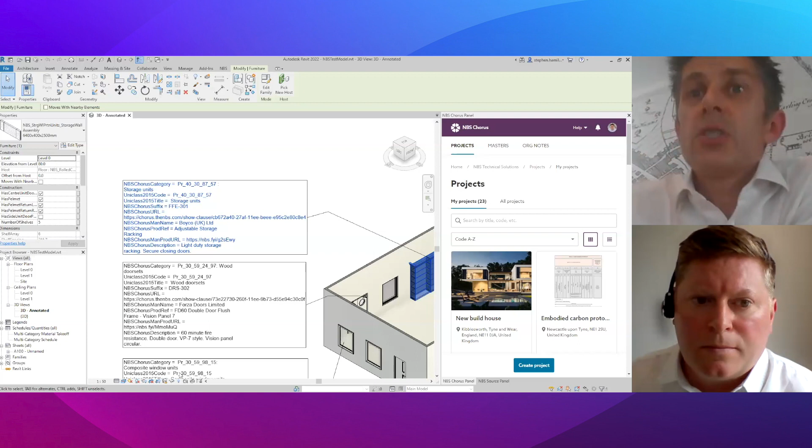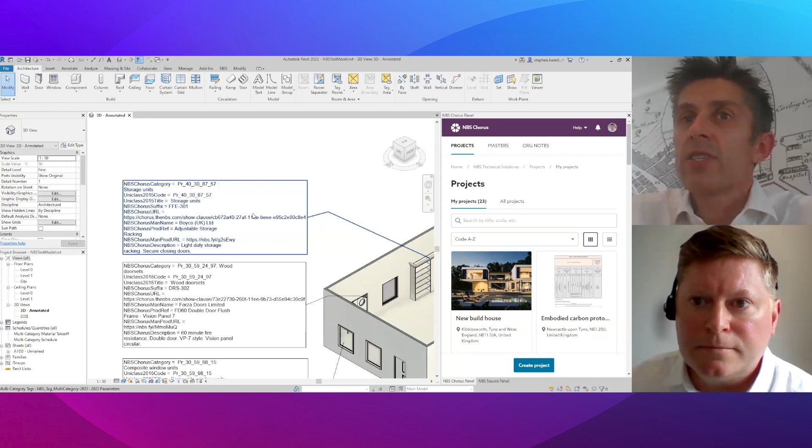But what I'm going to do is just open up this model in Autodesk Revit. It's not a design that's going to win the Stirling Prize. It's me putting a few windows and doors and carpets, etc. in. But this model, and I've gone completely over the top with the annotation here. I don't expect anyone would ever do this on a project, have so much info in there, but it's shown all of the properties that we're now sharing between NBS Chorus and the equivalent parameters in Autodesk Revit, either in family objects, layered objects, or the material layers themselves.

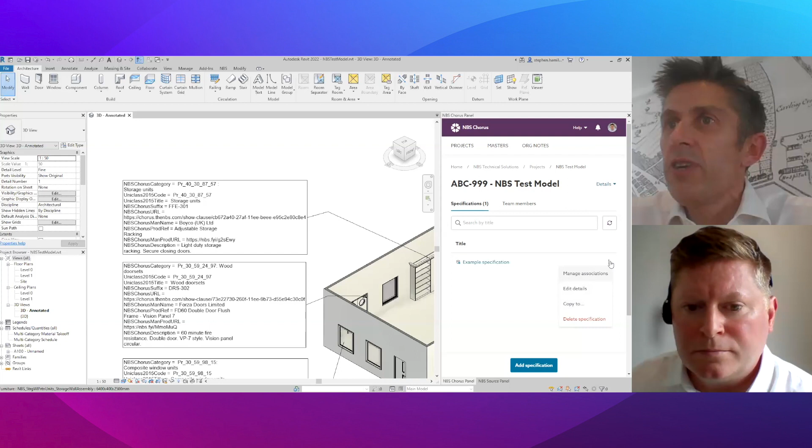So let's just show how this works. If you want to see the model integration stuff from first principles, there's excellent support information online. But this model here on the left-hand side has been associated with the specification inside of NBS Chorus. So you see the 3 dots there. You've got an association between the 3D model and the specification. And then to create a link between an object and the specification clause, you click on it here. And because that's already been linked, it jumps to the right clause.

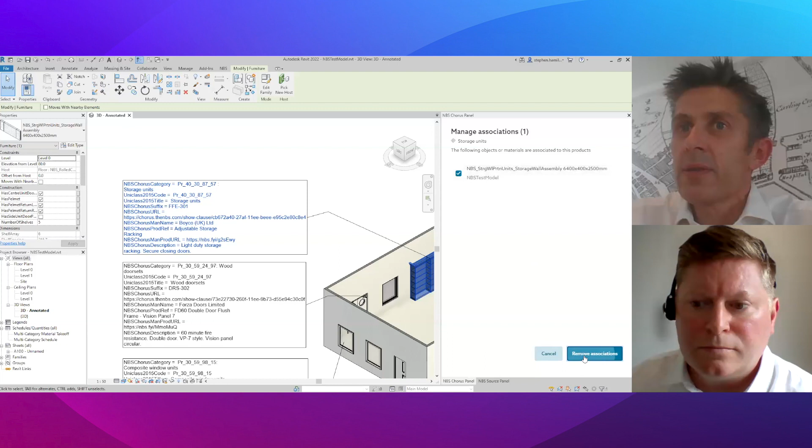Let's take that out for now. So I'm going to manage the associations and remove that link. So you'd start off with an object, which is in, say, Autodesk Revit here, and then I'd go and link it to the specification. And at the point where I link it to the specification, you're going to get a whole set of properties from NBS now drop into that object. And as I say, you might not want to put these in the annotation field itself. Keep that nice and short, classification code type.

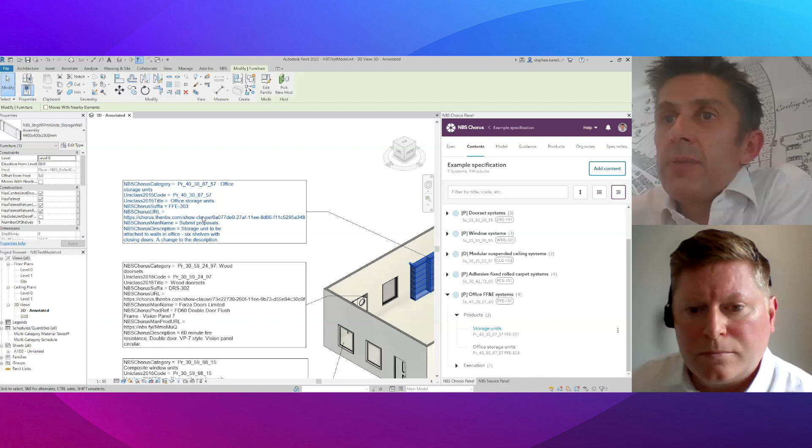But you probably do want to use them in things like material takeoffs and scheduling, and in the information you then share with people like client, cost consultant, main contractor, if they've got 3D model viewers, either proprietary or IFC. So that's now linked. So when I click on the storage unit here, it shows you the specification on the right-hand side, and note that this title is exactly the same as the parameter here, NBS Chorus description. You'll notice that FFE 303 is again exactly the same as well.

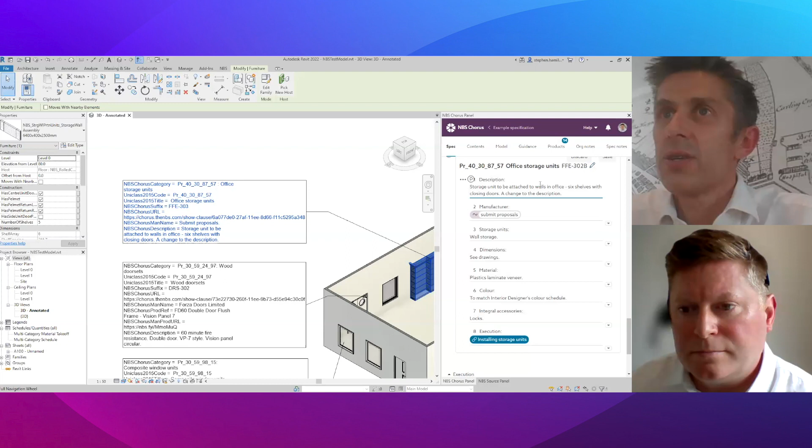So just to prove that, let's just change a couple of these. So let's call it 302B, and let's keep that nice and simple, make it shorter. So at the point where I click save now, we could potentially have a problem because the schedule will be out of sync with the specification. Annotations will be out of sync on your drawings with the specification.

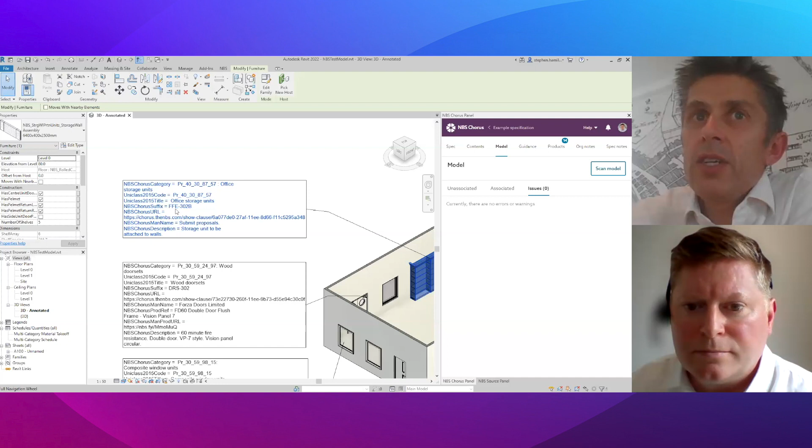But if I jump across here to the model, you'll see we've now got an issue in the model tab, and it's telling me that the parameters no longer match between the storage wall assembly object and the equivalent specification clause. So if you watch on the left-hand side there, when I click fix, you're going to see 303 change to 302B, I think it was, and the description get shorter. So update the object. And if you watch on the left-hand side there, it changes to 302B with the shortened description. So we're now allowing the information in the specification, the 7 or 8 key parameters, manufacturer name, description, Chorus URL, suffix, etc., to be shared.

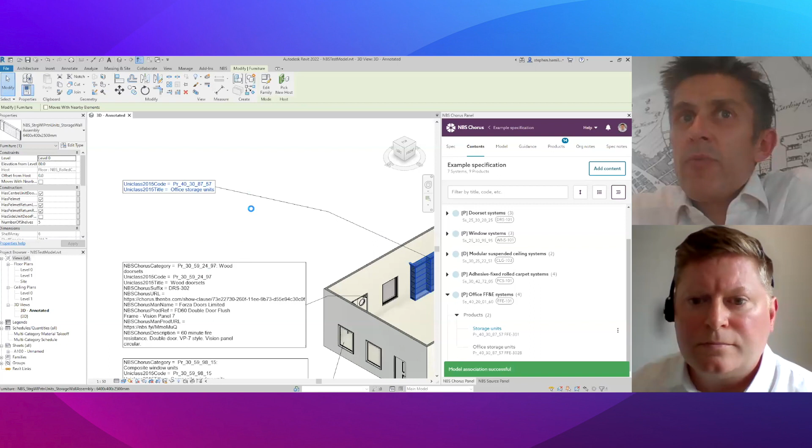Just to demonstrate that one more time, I'm going to change now the link between 302, which is this one, to the 301 storage unit. And as I do that, it re-associates all of the links with the different parameters. It takes a few seconds there because you might have lots of instances of that in your model.

One of the nice things is if it is a manufacturer that's been specified, over on the right-hand side you get the manufacturer name, in this case, Boyce, but also you're getting the manufacturer URL, which is what's trapped inside the spec there, which directs the user to NBS Source for the latest information. Is the product still available? Does it have an installation manual, third-party certification, etc.?

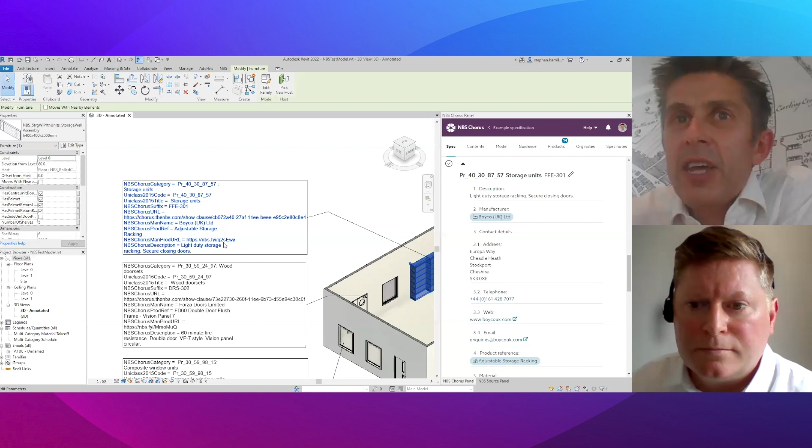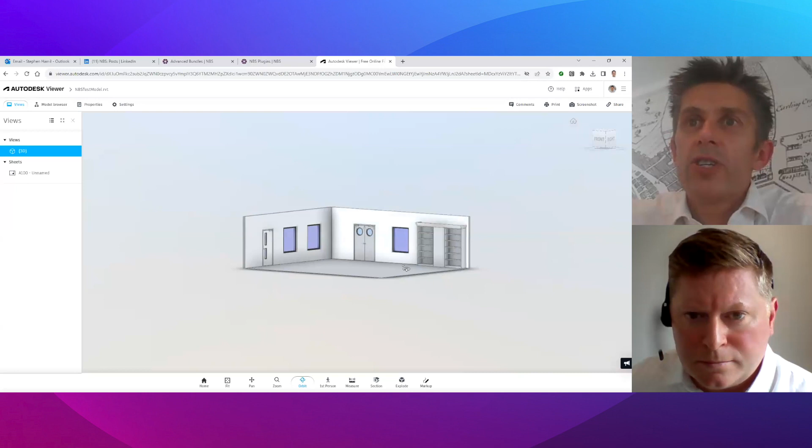So what I'm going to do now is demonstrate how this information can be used downstream. So you might work on design and build contracts and the main contractor wants to see it. You might work in an office where not everyone has access to Autodesk Revit and they use the online viewer, etc. So let's just jump across here. So here's the Autodesk viewer. This is just the free version. I guess it'd be similar if it was BIM 360 or what have you.

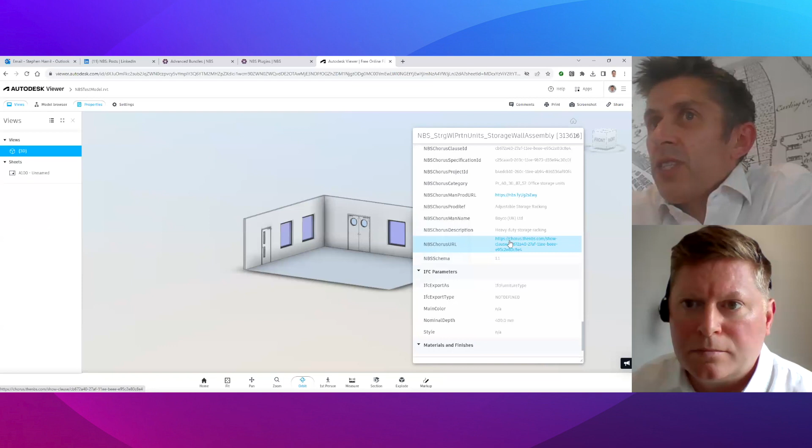I click on the storage unit and say, show me the properties. In the properties there, you're going to have those new NBS properties a bit further down. So you can see here, manufacturer product URL, clickable, Chorus URL. Working in a large practice where maybe the designer or the project lead wants to see the spec, you just click on here, and presuming you've got sign-in permissions for that spec, it'll jump straight to the specification. Maybe I've just got read-only permission and I can bang a little spec note in or what have you.

And when I click on the manufacturer product URL there, it jumps across and takes you to that manufacturer in NBS Source. And what we did, maybe there'll be some questions on this when we look afterwards, we really pondered on which parameters to use. So if we come back here, you see we've grouped them all as new parameters with the prefix NBS. And we were torn between, do we try to override existing parameters like manufacturer and model reference, or do we keep it nice and clean and just have an NBS property set?

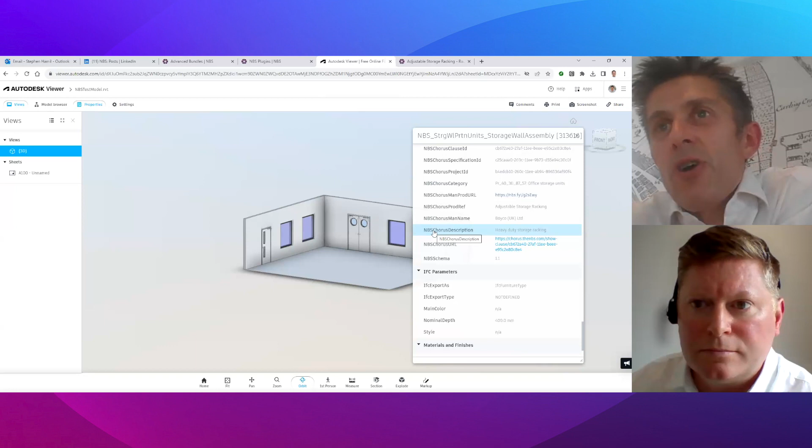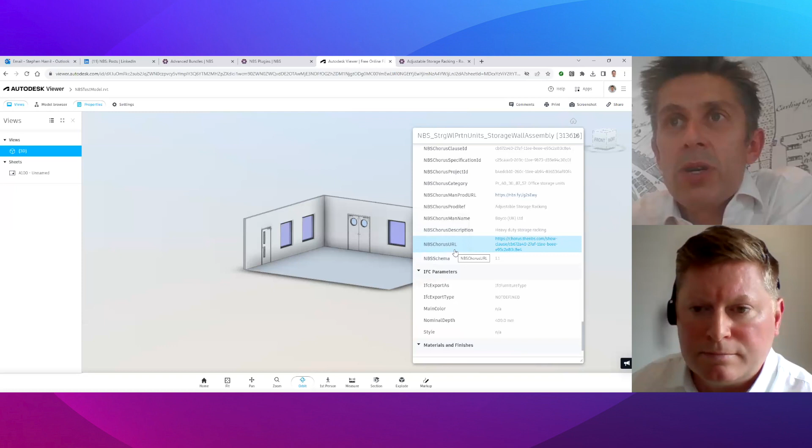And because a lot of people have read-only properties, or they maybe don't want the NBS Chorus plugin to override what someone has, we thought we'd keep that nice and clean. This is NBS information all in a set of properties. I think there'll probably be a little bit of disagreement where some people will think, no, you should have put in a different property. But overall, I think that probably is the right decision, but interested in feedback in the chat. And I know we're going to get some feedback next month because we're presenting at the Revit user group in London in September.

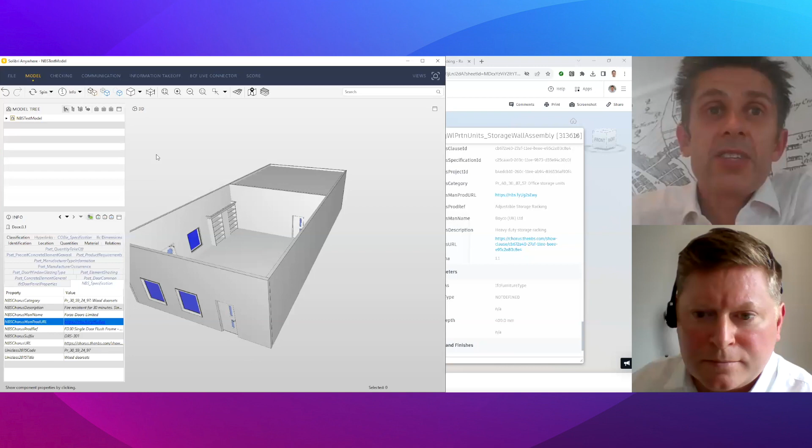But just here's the same model now in IFC. And what's quite nice about the IFC export, we just configured it using the little config text file, is we've got it as a nice, clean classification property set following the IFC schema. So you've got classification. This is Solibri model viewer, free viewer, Solibri Anywhere. And you've got the classification and the classification title splitting, which is nice for when you're doing your tree views and takeoffs in tools like Solibri. And we followed the way that the COBie specification property set works in terms of naming convention for NBS underbar specification. And there's all that information.

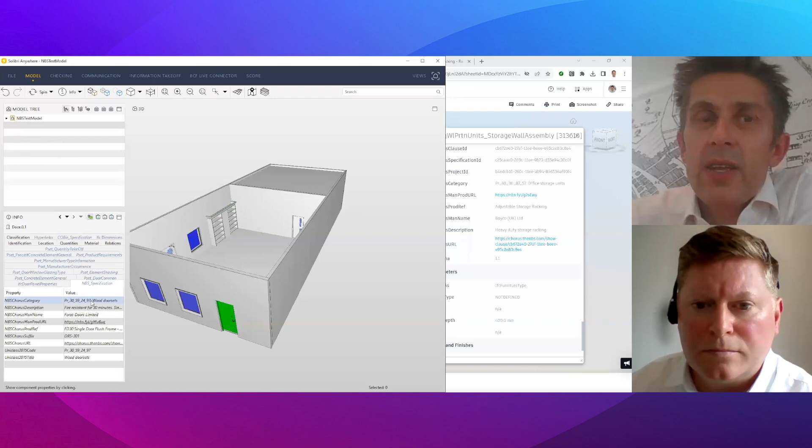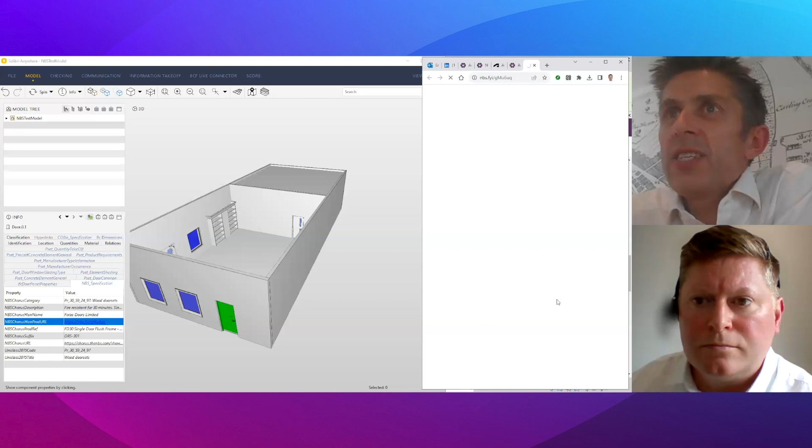Again, click on the window, click on the carpet, click on the ceiling, click on the furniture, whichever you click on there, you're getting a consistent set of information. And that big use case of anyone on the project team looking at something in the model viewer saying, what is that? And trusting the information in the 3D model with it linking now to the specification, there can be that level of trust that when you click on that URL, you can get the latest information from the source, from NBS Source. So here, verified by the manufacturer in the last 5 months, here's the information and certification that that particular product has.

So pretty excited about this, and it opens up the NBS workflow to not just the designer, but the wider project team using tools like Solibri, the data format IFC. We'll probably do another webinar on just this over the next 5-6 weeks, and we'll have a nicer model than my little Mickey Mouse two room box here. So that finishes the second upcoming improvement.

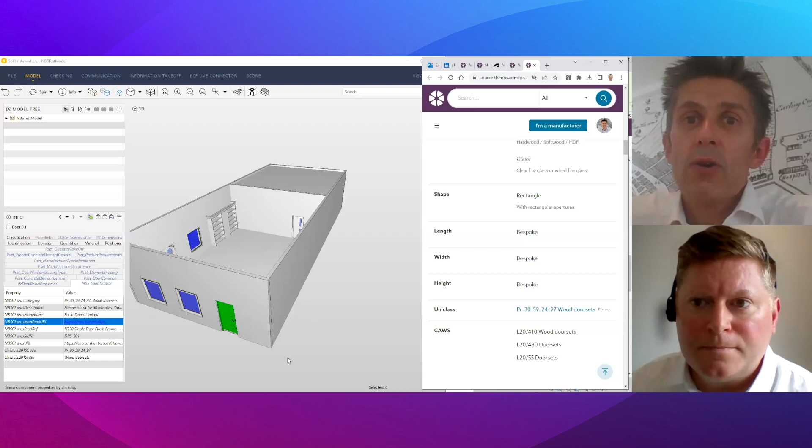We're now going to jump across and look at bundles. So you may have heard of bundles in terms of the way the webinar was advertised, on the newsletter, on social media. But let's just jump across to our web page. Just make this big again.